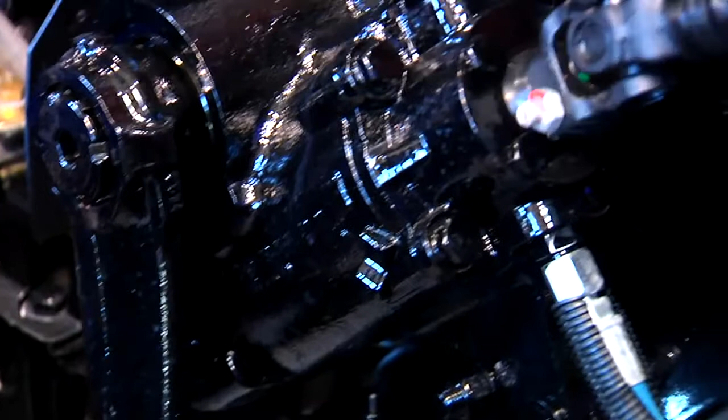The input shaft is connected to the steering column universal joint and is centered within the rotary valve in the neutral position by the torsion bar. It is an open-centered valve which allows fluid to flow directly through the steering gear and back to the reservoir at low pressure when the engine is running and no force is applied to the input shaft.

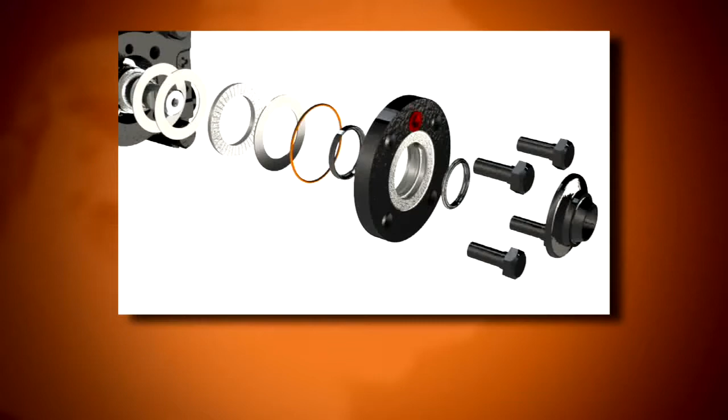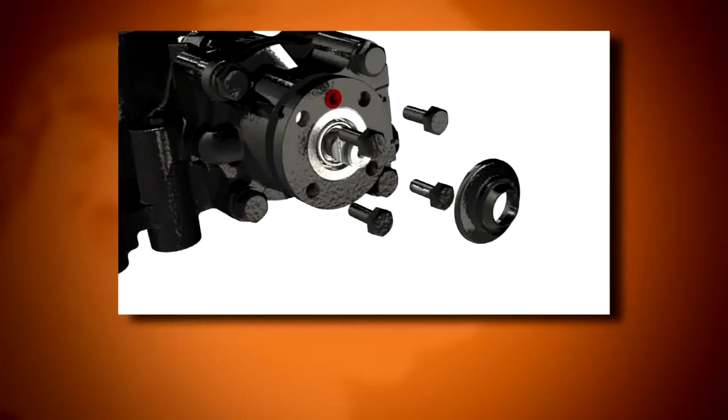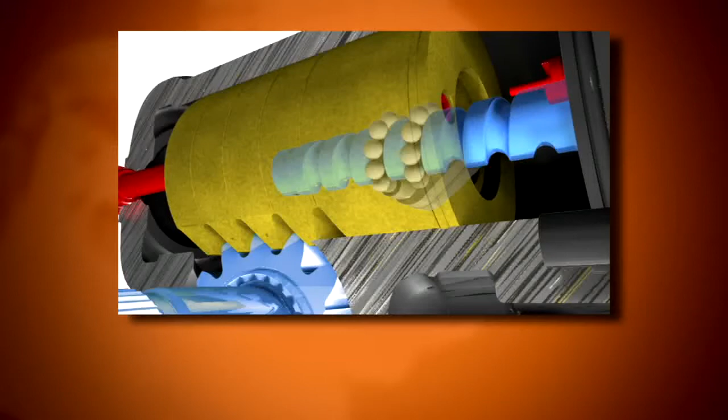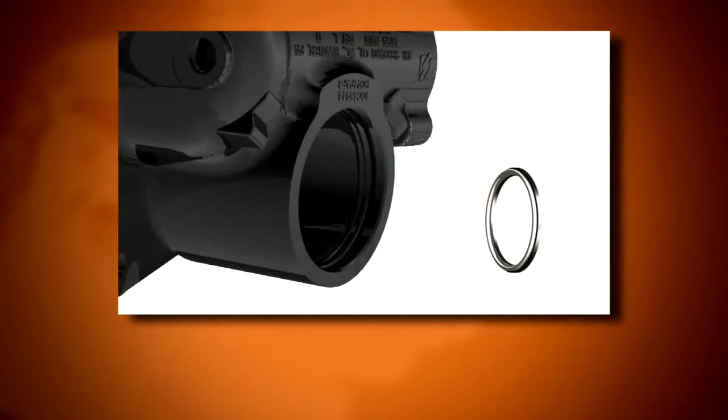The rotary valve shaft ball thread rotates within the piston on 24 steel recirculating balls. The sector shaft rotates on 2 roller bearings, which are constantly lubricated by the steering fluid. The sector shaft pressure seals are located next to each bearing. The sector shaft teeth engage the piston rack teeth machined into one side of the piston.

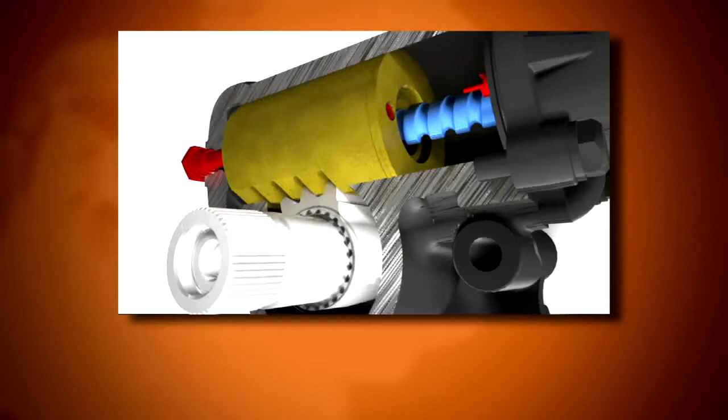The pitman arm is mounted on the tapered splines of the sector shaft. The arm will get tighter on the splines the harder it is worked. The pitman arm retainer applies the initial pressure to the arm to seat it onto the shaft, and then acts as a safety device to prevent the arm from coming loose if it was not properly torqued.

Relief plungers are located in both the bearing cap and cylinder head and may be either manual or automatic depending on the steering gear model. They must be correctly adjusted to obtain full turn angle or wheel cut of the steering and still prevent the axle stops from hitting the axle under full steering pump pressure.

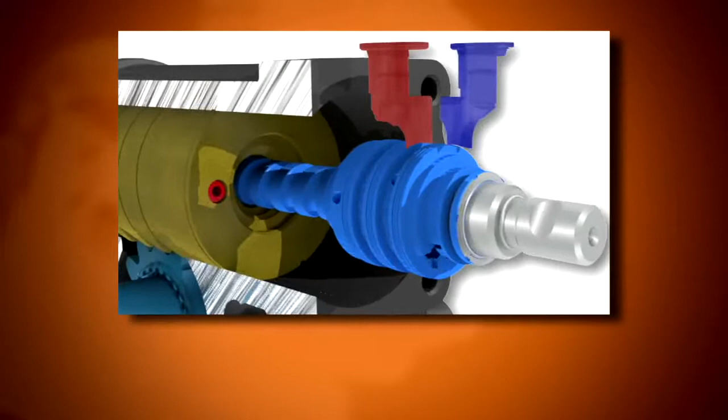Turning the steering wheel turns the steering column and rotates the input shaft. This overcomes the resistance of the torsion bar, which opens the rotary valve to allow as much pressure as is needed from the pump to push the piston through the cylinder bore. The more resistance encountered in trying to steer the wheels, the more the valve opens and more pressure from the pump it applies to the piston.

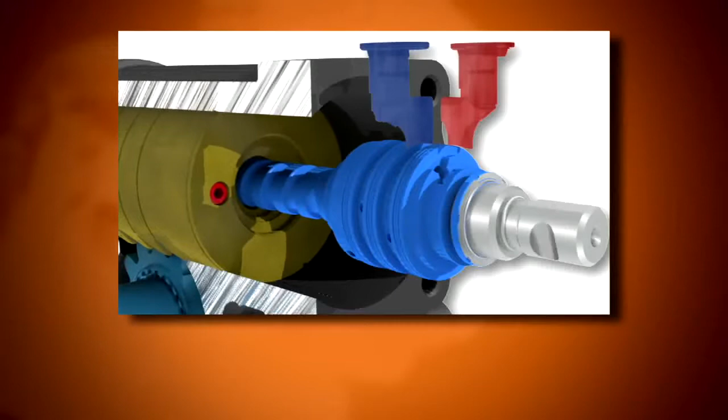At the same time, the rotary valve opens a passage back to the reservoir for the fluid in the opposite side of the cylinder cavity, allowing it to drain, and closes off the flow of fluid from the pump going directly to the reservoir. Fluid pressure and flow will push the pressure side relief ball off its ball seat, and along with the relief spring pressure, force the opposite side relief ball onto its ball seat, sealing off any internal leakage through the piston.

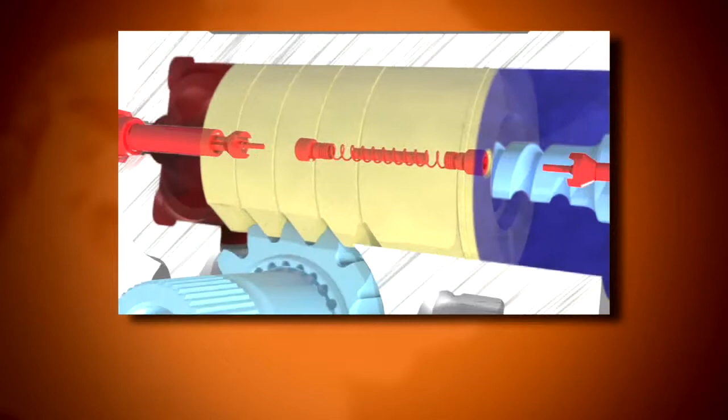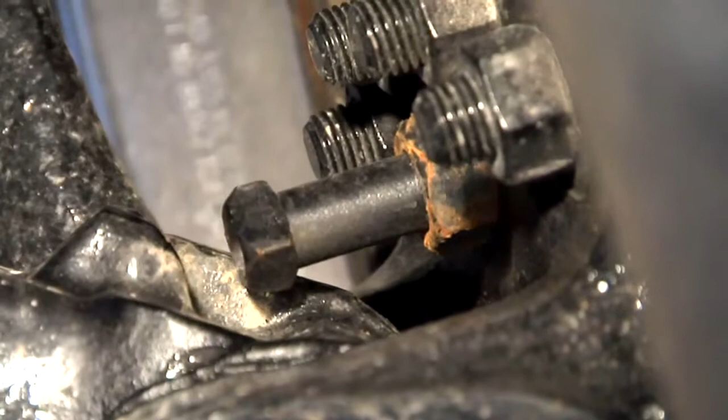When the wheels are steered to the full turn angle, the piston will move through the cylinder bore until the relief plunger contacts the relief ball and pushes it off its seat, opening the flow path for fluid back to the reservoir and dumping steering system pressure. This ensures there is not enough power assist to keep turning and drive the axle stop into the axle. The process reverses for steering the opposite direction.

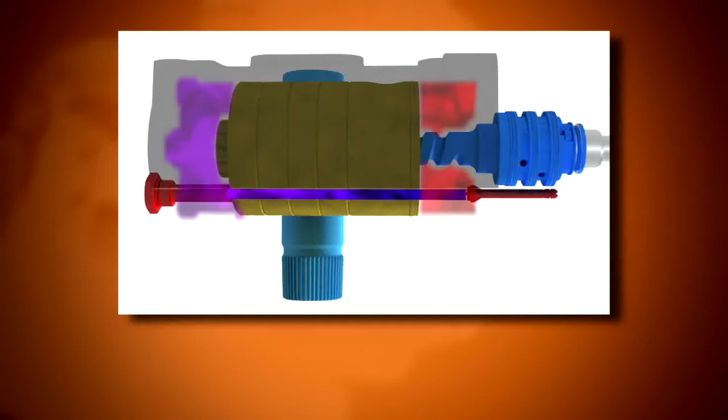When the engine is running, there is a constant flow of oil at low pressure through the steering gear until a force is applied to the steering wheel. This constant oil flow provides instant steering response and absorbs road shocks for smooth operation.

Note, if there is a loss of power steering pump pressure while driving, the steering gear is designed to provide a mechanical backup so the vehicle may be safely steered to the side of the road.

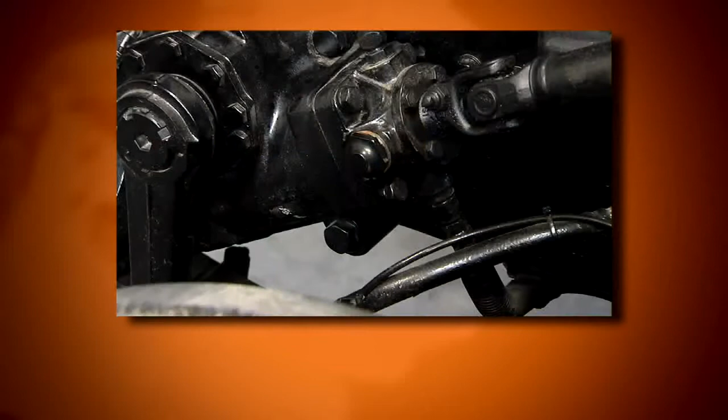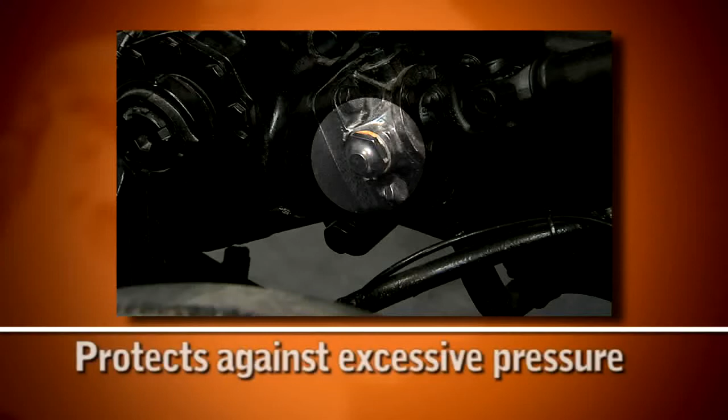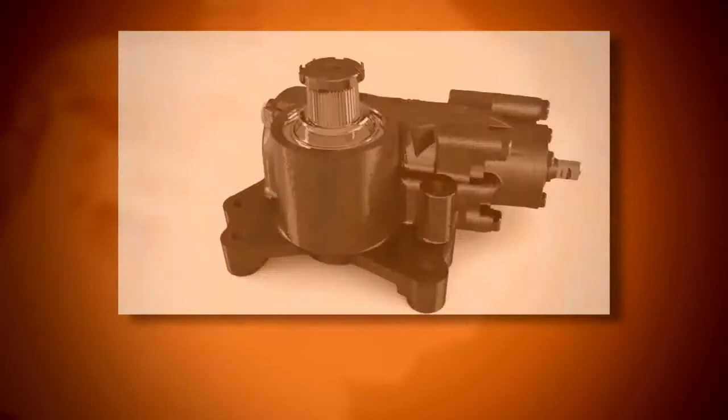Steering gears may be built with an integral pressure relief valve if the power steering pump has no relief or the pump delivers higher pressure than the gear is rated for. This valve protects the steering gear against excessive pressure and reduces system temperature by avoiding high-pressure bypass and recirculation within the pump. Sheppard steering gears are designed to provide long service life and simple repair.

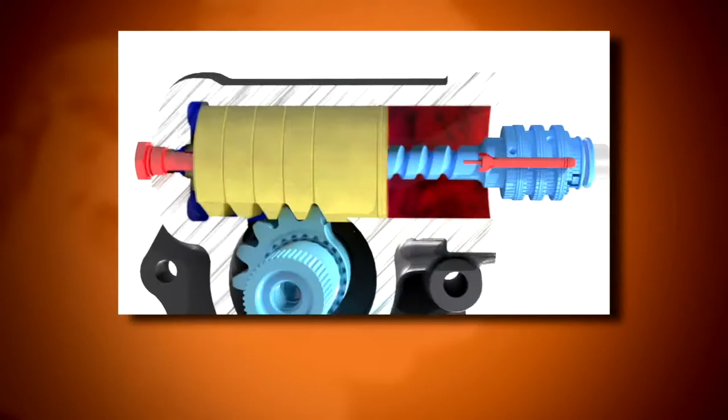The sector shaft to piston rack never requires center point adjustment. The relief plungers, once set initially, do not require adjustment unless axle stop settings or tire size is changed. With routine care and limited maintenance, Sheppard steering gears will provide many miles of reliable performance.